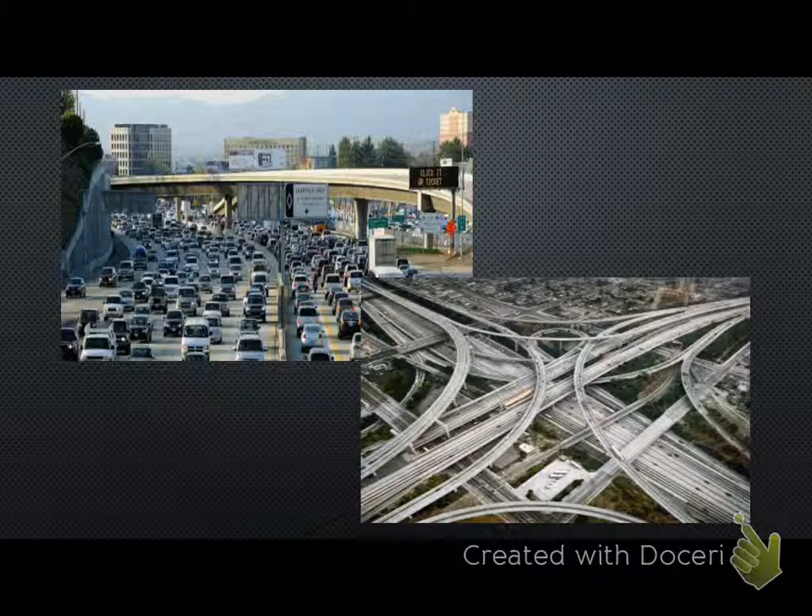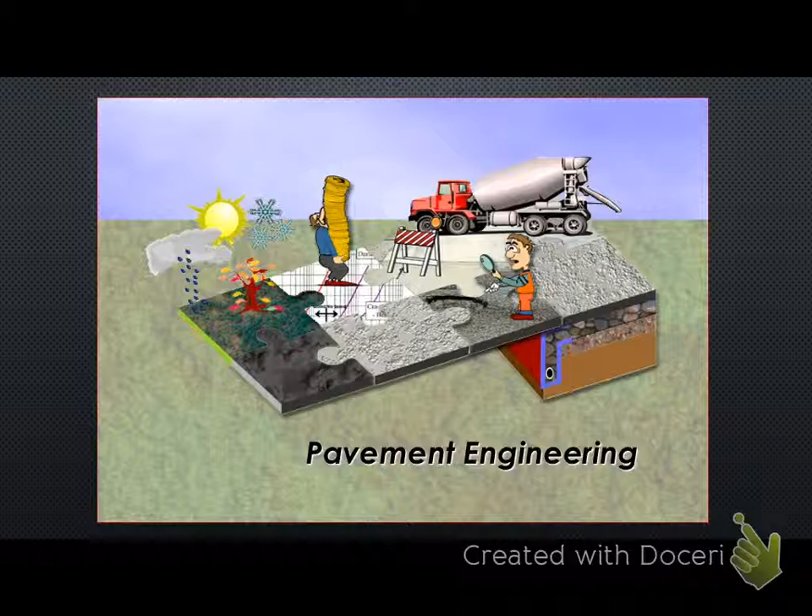So today's pavement engineering, which is a small specific area under transportation, we are looking at like this. This is from the federal highway - just so you know, there's a federal highway, and then there's a state DOT.

Department of Transportation, then there's county or district offices, and city offices, and so forth. The federal highway is all the way up top, and they spend millions and millions of dollars to come up with a better way to design and maintain the highways.

So instead of just putting a new road here, or resurfacing this old highway and hoping it will last at least 5 years, no, we don't want that. We want to exactly predict how long it's going to last in this condition, smooth nice surface, for 20 years, something like that. That's a new approach, and to accomplish those goals, we have to look at so many different components.

As you can see, the highways or pavements are only the top portion of the road. Beneath the surface, we have some gravels or crushed stone, what we call the base course. And then a few layers down, we have the original dirt, soils, what we call the subgrade.

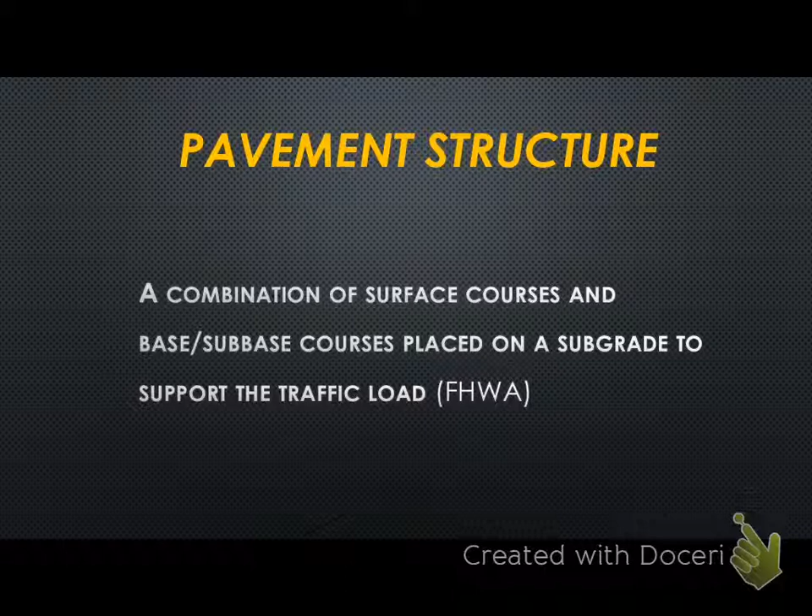Maybe your parents' car too. But I-20 is very heavy with semis, right? So that will make a huge change, and we'll get to that point in a minute.

So overall, this is how I define pavement design. This is just sort of my way. We're going to have a surface, some sort of in-between layers, and then we'll have a dirt layer. Now, the numbers we have to play with, or the design variables, are these.

And the design constraints are these: traffic, environment, and time. Now, since you guys are smart and working hard, that's you.

Anybody can tell what E means? Anybody can guess? The modulus of elasticity. Can you speak up a little bit for other students? It's the modulus of elasticity.

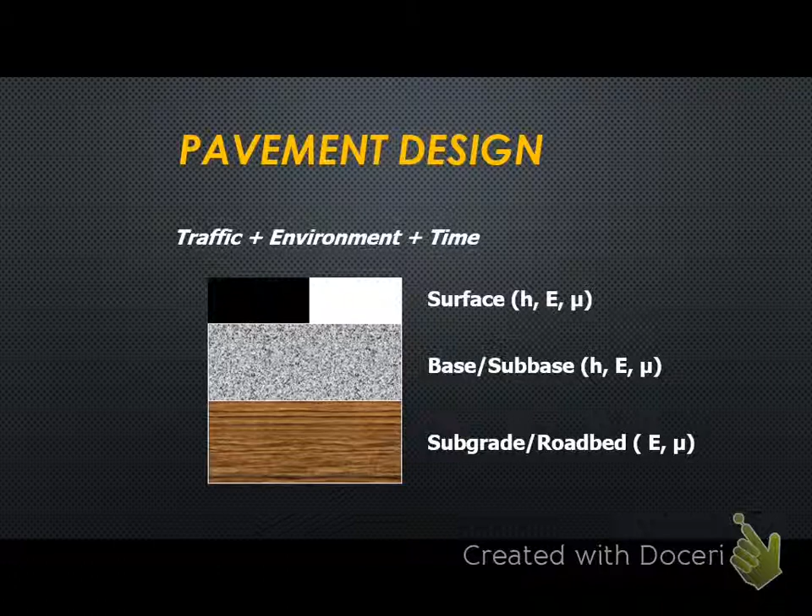Now, because we didn't know much, the first thing people did - so in 1950, '52, and the '60s era - they just built a test section. And you can tell by the equipment, pretty old. We could put cows and horses right next to it - it'll be the same though, okay?

So the Federal Highway Administration and AASHO, that organization, they built lots of test sections. And then there was a full-time truck driver, just like NASCAR or Indy 500, whatever - their job is just driving the truck again and again and again on the circuit.

And then, once in a while, engineers will go and check what kind of damage we got and how many passes of this truck we've had, those things. And then try to correlate between the environmental condition and the loading condition - I mean traffic loading - with the damage, so we can learn. That was the initial stage.

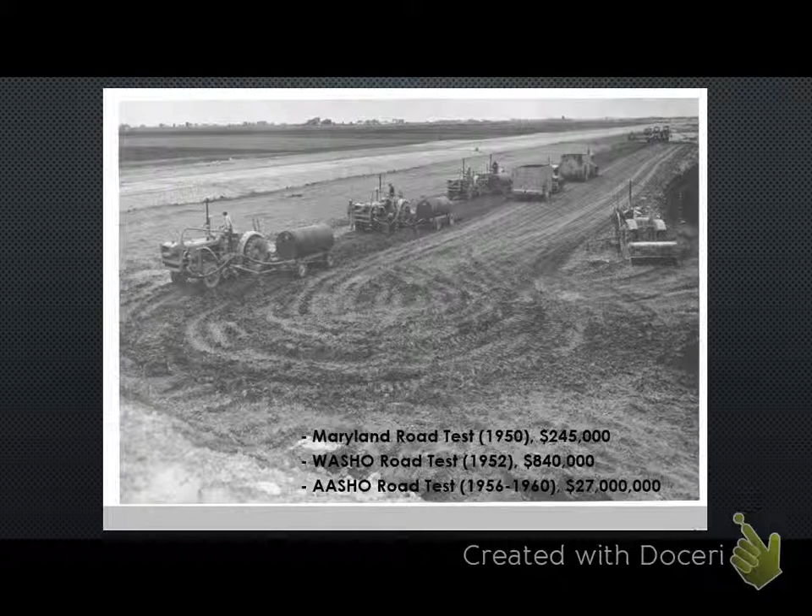Now, one thing we need to remember: pavement design is very different. There is no certain or perfect highway. Now, most engineering projects have a certain goal. But for roads or highways, it is very hard to say what is the goal.

So, number one: the pavement structure deteriorates gradually over many years - hopefully many years, not next year. So we have to predict what that deterioration rate is over the next 15 or 20 years, and then decide when we need major rehabilitation, resurfacing, or any kind of maintenance necessary, so we can budget those things.

And the other thing is - going back to the first picture that I showed you - there is a structural condition, but at the same time, there's a functional condition.

So what that functional condition means is how comfortable the drivers, the users, would feel when they are driving on the highway. So again, it's very subjective, and most important, we cannot really define failure. What is a failure? Somebody can say, well, when there's a crack, that's failure. But somebody says, I don't care, I can drive on it. If you're driving an F-150, you can go anywhere, pretty much. You don't need a highway or a smooth surface. Who cares, you can just go, and that's the definition of road. But if you have a really nice, smooth racing car or something, you don't want to go where you cannot get satisfactory functions. So it's very subjective and hard to define the failure.

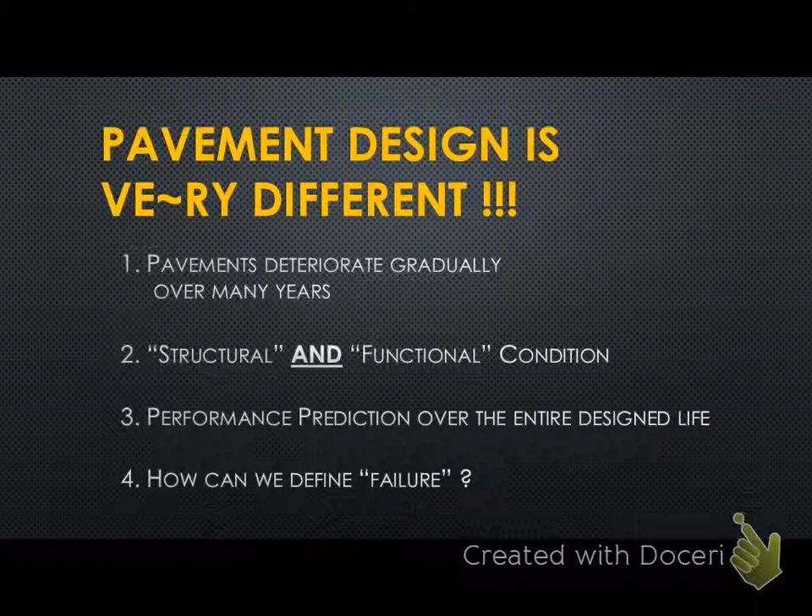So there has been a lot of discussion and research over that, but the way we answer those challenges in pavement engineering is, first, we look at what we call the failures or the distress conditions. You're very familiar with all these, right? You've seen this already. Maybe not this, because Texas is a kind of warm area.

Okay, now what is that one? Alligator. Really, the name is alligator cracking. Maybe crocodile, I don't know, I don't know the difference. And that is the fatigue behavior. You can see that problem happens when the surface is old, so the color is grayish, not really black. It's been there for a long time, then you will see those problems.

The other problem, which is very common in warm climates, is rutting. The worst one I had was somewhere in Missouri, and it was like a railroad. Once you get on it, you just stay there, it's automatic drive, you are in there already. So for the next 20 minutes, just set the cruise and take a nap or whatever. Some states or some roads are really severe, they suffer with this problem.

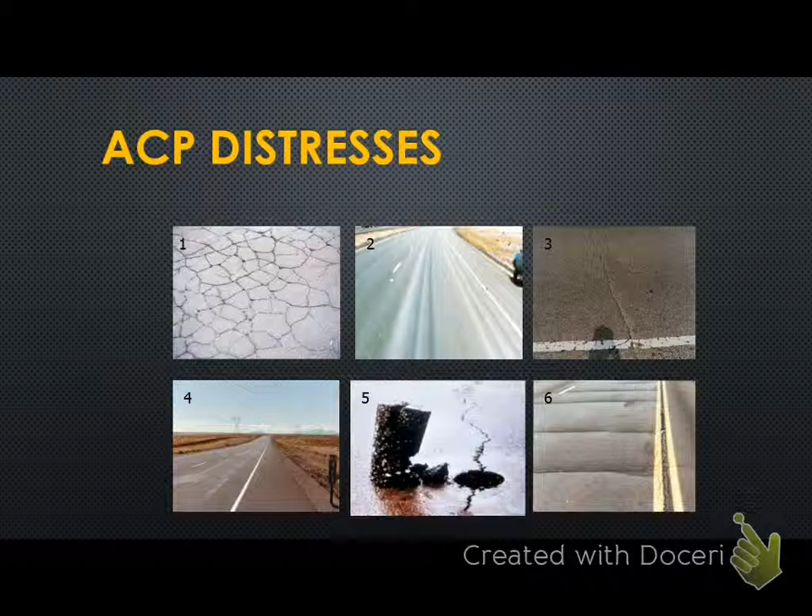Now here's the pop quiz for your extra credit. You're not taking my course, but okay, why do we need a joint for concrete pavement? Can we make it just one huge slab so it will be very smooth? Because the problem with concrete pavement is when you are driving on it, you can hear thump, thump, thump, thump regularly, and that's because the tire hits the joints. It's sometimes very annoying, but there's nothing much we can do. We need to have a joint.

Now why? Thermal expansion, thermal expansion. It expands and contracts based on the weather. Perfect, you should get an A. So come take my class, I'll get you an A, it's only 2 hours away. Okay, exactly.

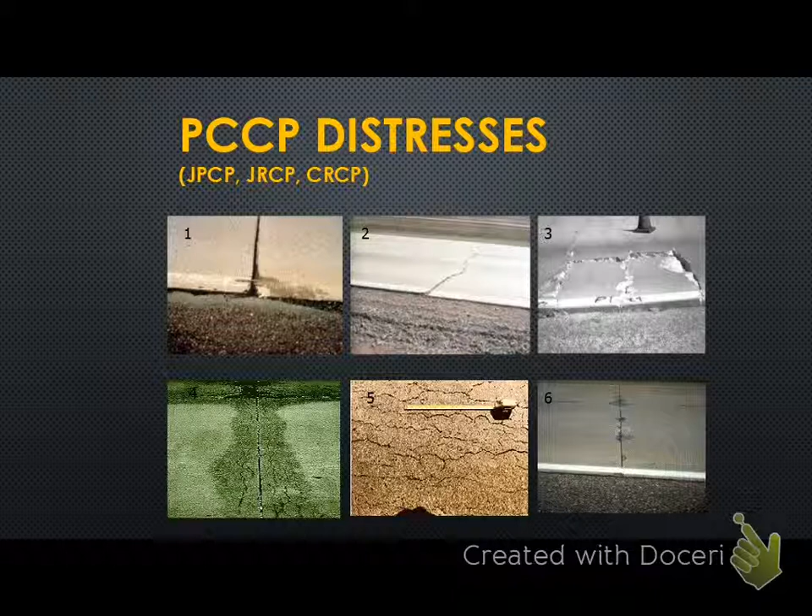Now, material or any structural member will fail without any loading condition just because of the temperature, right? That is the thermal stress, what we call it. They want to expand when the temperature is high or the humidity is high, any material on this planet. They want to shrink just like our body or skin when the temperature is low or when it's dry. If they cannot do that volume change, if something prevents that volume change, then that stress will cause a problem, and that becomes a cracking. So we need to put engineered cracks, and that is a joint, that is a joint. And we have jointed this way, we have jointed that way, to prevent those problems. Yeah, it's just like action, reaction, those things in physics.

Overall, this is how we look at the structural design of two different surface courses. So the left side is an asphalt concrete mixture on top, and the right side is a Portland cement concrete slab. Although the underlying layers might be similar, the mechanism or the stress distribution below the top surface course is very different, because asphalt is not very rigid.

It will distribute all the traffic load all the way to the soil, the subgrade. However, concrete slab is very rigid, very stiff, so it will take care of most of the traffic loading, and then it can sit directly on the subgrade. Sometimes, depending on the traffic condition, we don't really need interlayers in between the top and bottom.

So the challenge is how that load will spread, how much it's going to spread. We have like your passenger car, 30 psi, 32 psi, higher pressure normally. So we have 32 psi on top, that contact point. Now how many psi is going to be here?

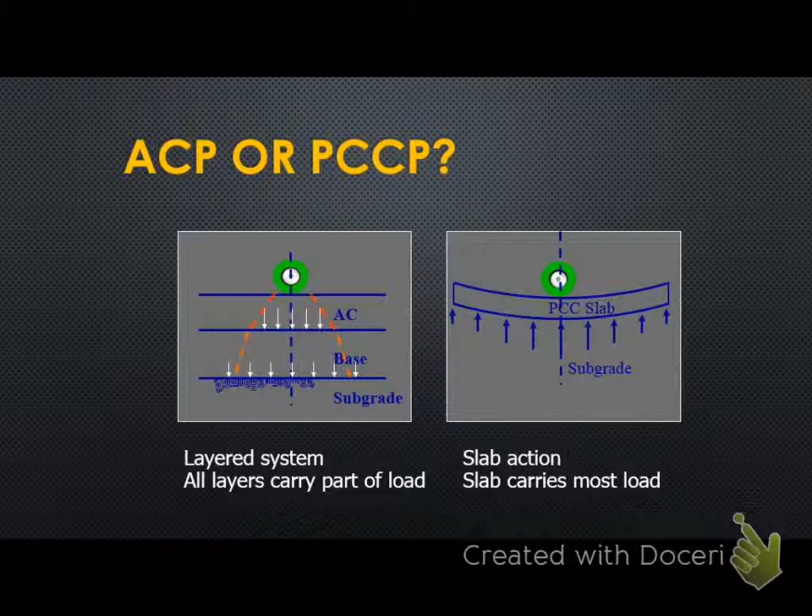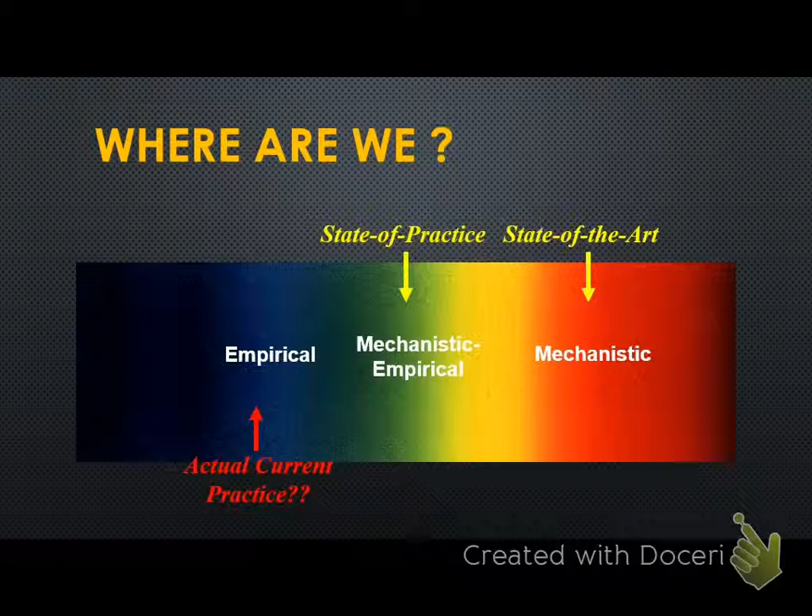So we've been in this era, and then in the 21st century, we moved to what they call mechanistic empirical design. So we heavily rely on the material behavior that we can predict and test in the lab. However, in reality, because of the correlation, we need a little bit of empirical relation at the end. Somebody said we're going to move to a purely mechanistic design, but I'm not a big fan of that era. This is good enough for me. There are different aspects, but I'm a very practical engineer.

So overall, the flow chart looks like this. We look at the conditions and gather all the inputs, then we process those things, and there are the structural responses like sigma, epsilon, delta. We use a lot of Greek symbols, right? And my students hate those — why don't you just give us a numerical number? No, you gotta use symbols so you can generalize the relation at the end. Also you cannot use a calculator, from the instructor's point of view.

But anyway, once we have those, we're going to check all the distresses that I showed you in the pictures, how they're going to happen and in how many years, and then we're going to check the smoothness too. If it's not smooth enough, then that's failure. Each state DOT has a slightly different number to measure this, the standard. And then if something is not right, we're going to go back, of course. So that's a simple flow chart for that.

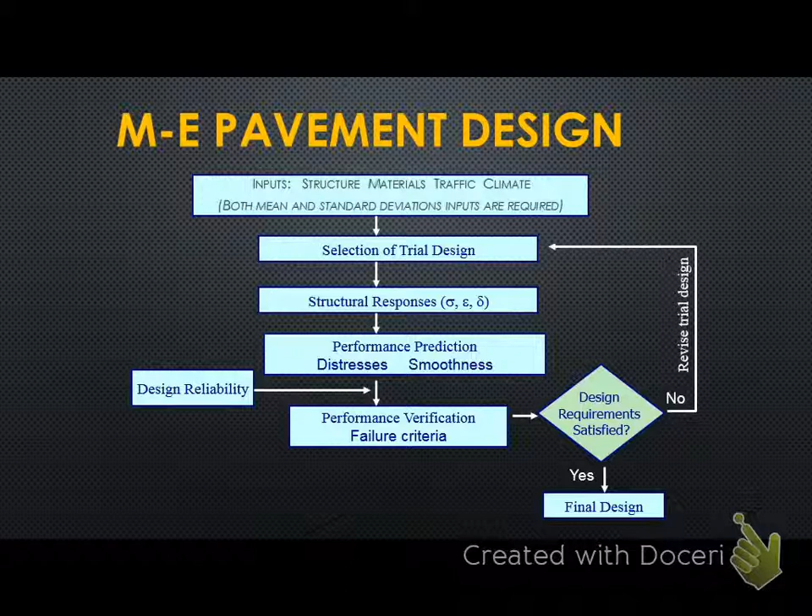Speaking of this hot mix, especially for somebody from the chemistry area, I believe you guys know much more than me on this topic. Asphalt, the liquid asphalt, comes from the crude oil refinery process — basically the scum at the bottom, that's asphalt, right? All the good ones are on top: gasoline, kerosene, and all those. For the refinery process, you gotta go to Houston, then you will learn.

And then at the bottom, there's a scum, and that is asphalt, and we are recycling that as a construction material. As you can see, by weight or volume, aggregates are the majority. Then we have a little bit of asphalt there because that's the glue holding the aggregate together, and then there are some air voids no matter what.

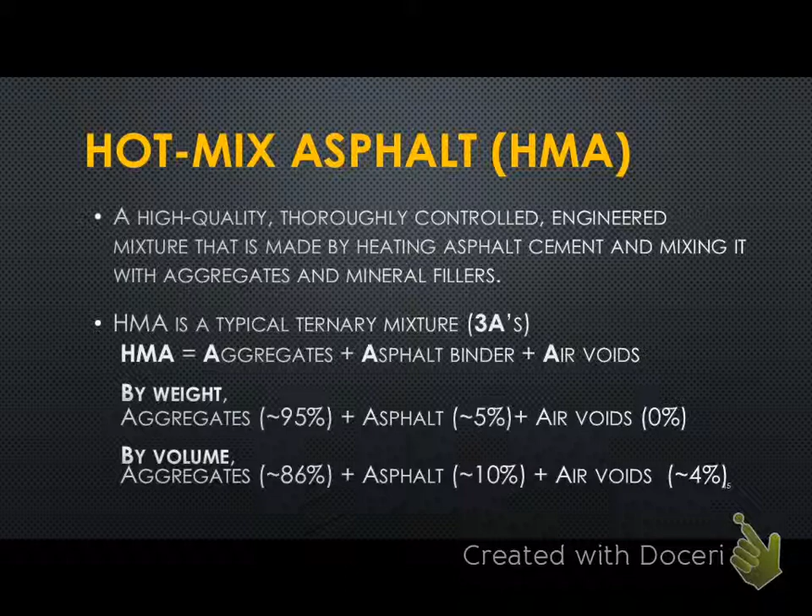By changing these components, or the physical and chemical properties of each component, we can make a totally different material. We can make a material that will last on I-20 for the next 30 years, or it's just good enough for your driveway. Same material, but a slightly different way to design that mix. And that's where the engineer plays a really important role.

A key aspect of liquid asphalt is, have you heard of this viscoelastic material? I know some of you are in material area too, and somebody might say viscoplastoelastic. So asphalt is a really funny animal. It's got an elastic component, a plastic component, and a viscous component, all three properties together. So how we're going to handle that situation, that is a challenge.

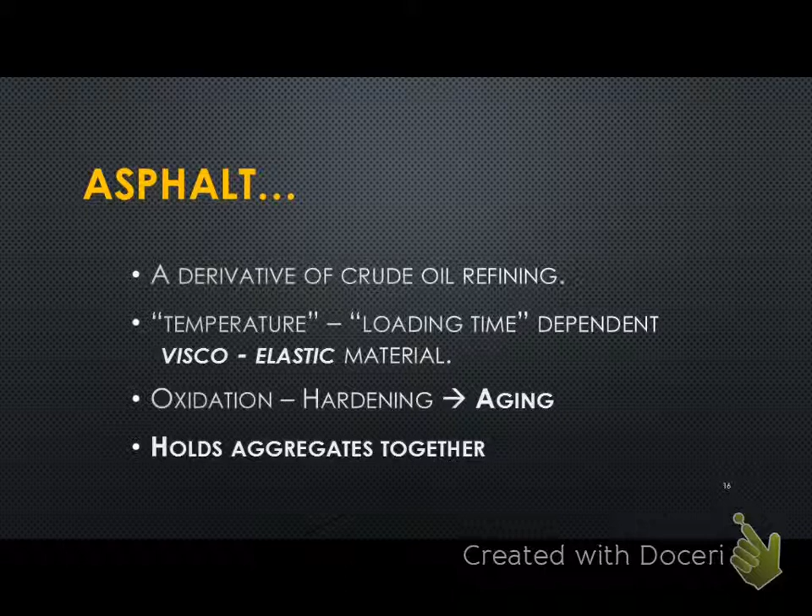And the other thing is, the asphalt gets old. It's going to get white hair. When it's young, it's black, right? A year or ten years later, they're all gray. They age. So we have to know how fast they're going to age too.

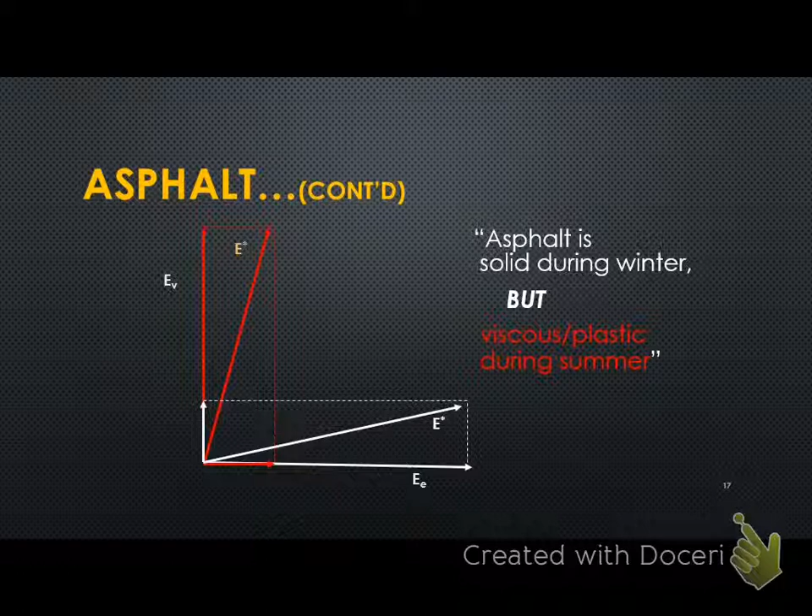And the other thing I want to point out is summertime versus wintertime. Say 100 Fahrenheit and 30 Fahrenheit, the behavior is different. The elastic component or viscous component, which one dominates, that depends on the climate. And that's why we have to look at the site condition.

And then aggregate, obviously one of the big things about aggregate is you can just look at this. Now I have two aggregates. One is crushed stone with a very rough surface, crushed from the quarry. The other one is from a river, dredged and dried. They tend to be very round and smooth. When it comes to what we call the shear strength or the supporting strength, this one can fail easier than that one. Can you imagine that relation?

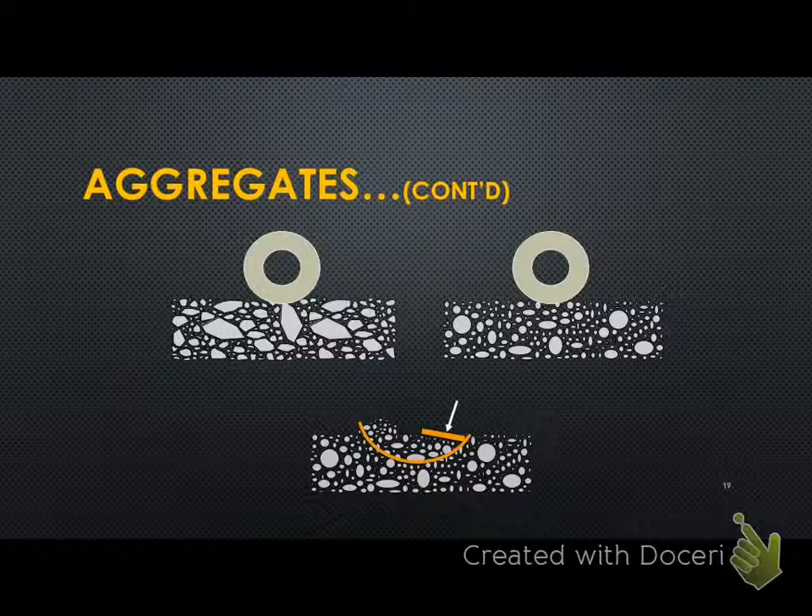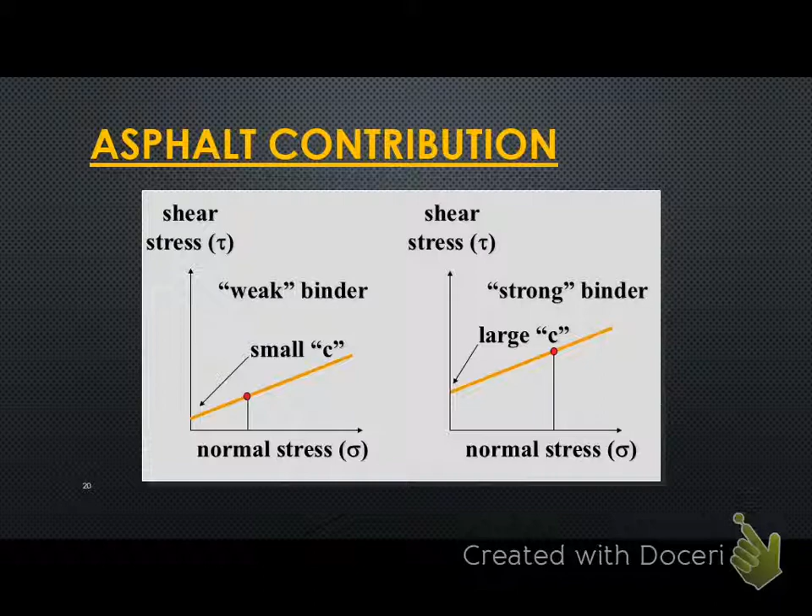Of course, after enough math and physics, you can use an equation for that. Right now, you just understand the concept. So this is how we're going to look at all those, what we call the Mohr-Coulomb failure envelope. There is a component that we can expect from the cohesion, the stickiness of the asphalt, and then there's another aspect that we can get from the friction of the aggregate. So we can play with those variables to make the best material.

So basically, you are coming up with your own recipe, the best recipe that everybody will like. However, another constraint is you have to use locally available material, because this is engineering, right? Now, Georgia has a lot of granite, which is the strongest or the best aggregate.

And like Iowa, they have lots of limestone. It's very soft, very weak. Now, if we want to use granite for construction in Iowa, then we have to haul all that aggregate from Georgia to Iowa. That hauling cost is going to be tremendous, right? So we have to look at all those aspects and try to use locally available material as much as possible to reduce cost, because engineering at the end is all about the cost.

We can design the same thing so many different ways, what we call alternative design. At the end, what's the answer? Which one costs less? That principle applies to any kind of engineering area too. So we are trying to use locally available material and find the best recipe.

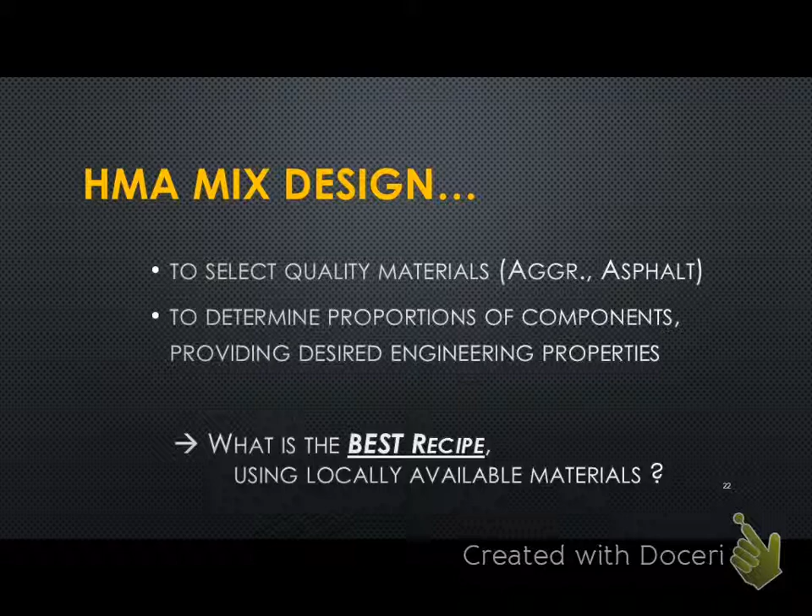Some interesting, relatively new material that's getting very popular is roller compacted concrete. What that means is, you know concrete, right? It's kind of like oatmeal - there's some aggregate, but it's cement, gravel, and water together. But the roller can sit on that mix and then compact it. So it's a very dry and stiff concrete mix, just right after the mixer discharges it onto the surface.

And the other interesting thing is the porous asphalt mixture. You can clearly see we pour water on top, and this side is porous asphalt mixture, and this side is regular asphalt mixture.

In a porous asphalt mixture, we arrange the aggregate particle size very carefully so we'll have interconnected holes while holding a strong enough, stiff enough mixture, so the water will drain all the way down and meet the drainage pipe and go to the ditch or somewhere.

The problem with asphalt is you don't feel safe driving on an asphalt road when it's raining, especially at night, and you get lots of splashes from the car in front of you, mud and whatever. So anyway, there's nothing much we can do. To answer the question, we have this.

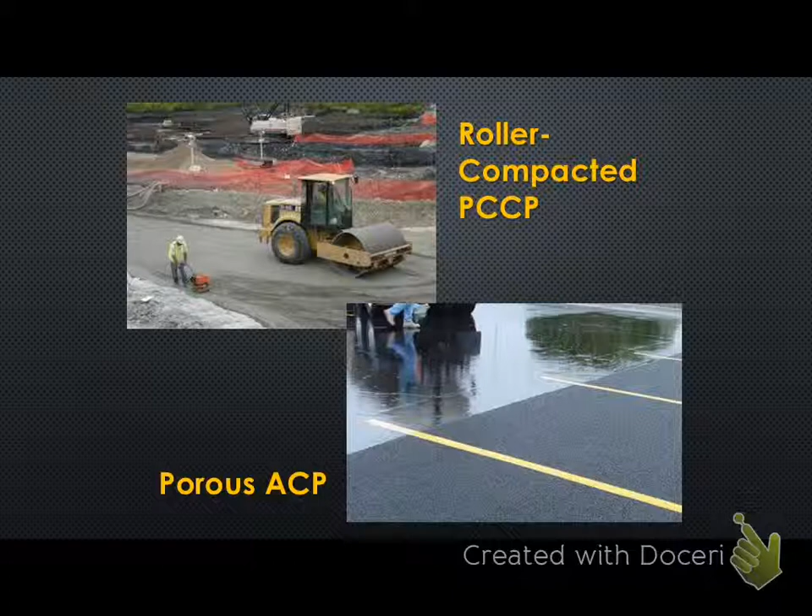I know it's deep, so. Any questions? Any questions?

Except North Korea, I have no idea about that country. I'm from South Korea. Yes, sir.

I'm a civil engineering major, and I'm actually just learning about pavement right now in construction engineering. I was wondering, for the porous asphalt hot mix, do you find that there's a significant decrease in the strength of the material?

Well, strength will decrease. It's not going to be the same as a regular mix, but the challenge is that's our homework - we have to make it strong enough for a certain condition. For example, if we have this porous hot mix and no matter how hard we try we cannot make it strong enough for an interstate highway, then what? At least we can use it on the street, avenue, or parking lot. There's lots of different uses.

And that's another thing we as students need to develop - think outside the box. One of the interesting research projects I was involved with - everybody has a toilet, right, ceramics. At some point you have to replace it. One of my research areas was, can we recycle that broken ceramic tile or toilet as an aggregate to make hot mix? Of course, it's possible.